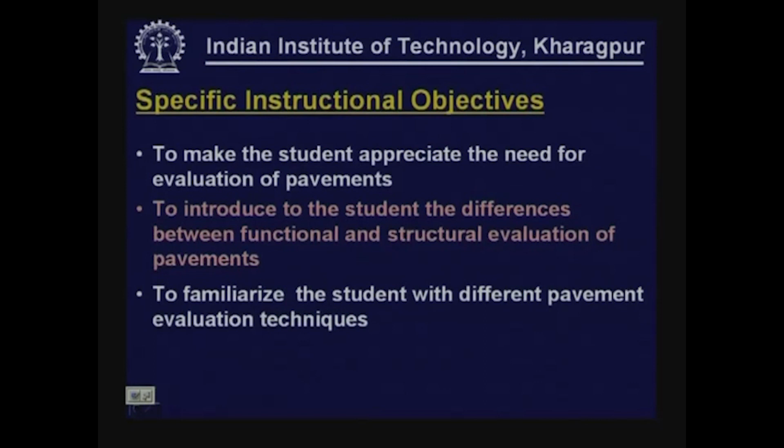Any structure that is built will deteriorate with time when subjected to loads and various climatic factors. So all structures, including pavements, will deteriorate with time. It is necessary that these structures be evaluated occasionally, periodically, to assess their structural condition and also to assess the remaining life of the pavement and how much more time it can serve users satisfactorily.

For that, one should have appropriate tools to evaluate existing pavements, collect data and information, interpret that data, and make the right decisions regarding the condition of the existing pavement and what is to be done if its life has to be extended by a given number of years.

All pavements deteriorate with time due to repeated application of vehicular loads and the effect of climatic parameters. The rate of deterioration depends on the initial condition of the pavement, the rate and magnitude of traffic loading, climatic conditions, and various other parameters.

It is also necessary to evaluate the functional and structural condition of the pavement periodically. We should be able to assess the structural and functional condition periodically and decide whether the pavement requires any maintenance, major rehabilitation, or even reconstruction. The need for maintenance and rehabilitation can be assessed on the basis of this evaluation.

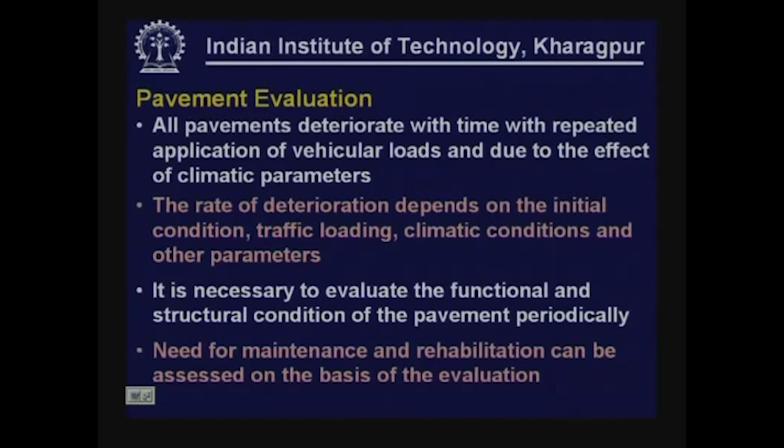Pavements are evaluated typically for two types of performance: functional performance and structural performance. Functional performance is the ability of the pavement to provide a comfortable, safe, economical riding surface to the users. That basically is the function of the pavement as far as the user is concerned.

The user requires a safe, comfortable ride. As long as the pavement is in a position to give satisfactory service to the road user in terms of safe, comfortable ride, the pavement continues to be in a functionally acceptable condition.

Functional performance can be expressed, measured, or quantified in terms of either the present serviceability index discussed in AASHTO pavement design, or in terms of roughness, or skid resistance, or any other parameter related to the surface that relates to the safety and comfort of road users.

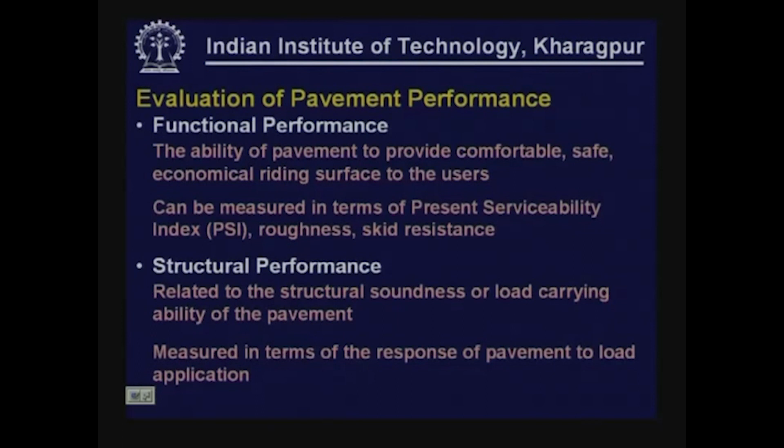On the other hand, structural performance is related to the structural soundness of the structure or its load carrying ability. This can be measured normally in terms of the response of the pavement when subjected to a load. So structural performance is normally expressed in terms of the structural response of the pavement.

As discussed in previous lessons, functional evaluation can be done in terms of present serviceability index. This is one of the commonly used parameters, though not so common in India since AASHTO is not that extensively used here. For evaluation of functional performance of the pavement, present serviceability index is a parameter that is normally evaluated, a concept developed during the AASHO road test.

The AASHO road test equation for present serviceability index correlates the present serviceability index with the surface characteristics of the pavement, such as slope variance, which gives an indication of the variance of the surface profile in the longitudinal direction, and rut depth for a flexible pavement.

Rut depth also applies for flexible pavement; for concrete pavement, both cracking area and patched area are expressed in terms of square feet for 1000 square feet of paved area. Similarly, patching is also expressed in terms of square feet per 1000 square feet of paved area.

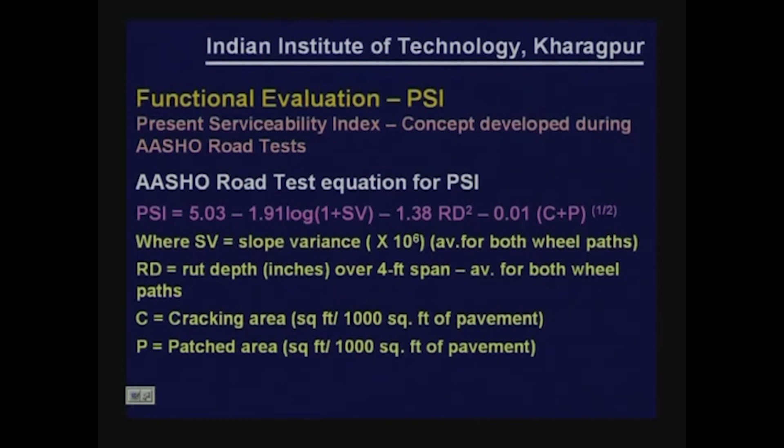So as we can see, in the case of flexible pavement, present serviceability index is mainly based on what can be measured in terms of surface characteristics: surface profile, rut depth, cracking and patching, which is what you can observe on the pavement surface.

Another parameter most commonly used to evaluate functional performance is roughness, how rough the road is. Roughness is usually expressed in terms of a convenient index. Various types of indices are used to express roughness. This is a convenient index that reflects the user's response to a road of a given profile while traveling in a standard vehicle. That means how the user perceives the comfort level offered by a given road having certain profile characteristics and various other surface conditions, expressed in terms of roughness index.

All the roughness indices used by various agencies are developed such that they are sensitive to the road user and the user's perception of surface conditions in terms of the comfort the road user is getting.

Roughness is a measure of variation of surface profile and other surface distresses that may have some influence on ride comfort. So roughness will be influenced by all those surface parameters that affect ride comfort. Some commonly used indices for roughness are bump integrator value, MERLIN roughness index, and international roughness index. We will basically be talking about these three main roughness parameters: bump integrator value (BI), Merlin roughness index, and international roughness index.

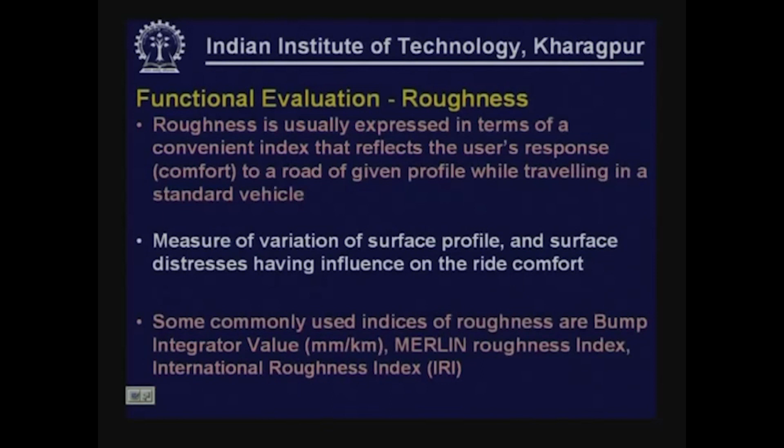The roughness in terms of bump integrator value is normally measured using an equipment called the fifth wheel bump integrator. This comes under a class of roughness meters known as response type roughness measuring meters.

The roughness of the road can be obtained in terms of the surface profile. One can measure the surface profile by taking levels using the rod and level procedure, or there are other equipments which give us indices that say something about the profile of the road.

These indices are also expected to give some idea about the comfort road users get. Response type roughness measuring meters are equipment which measure the response of a given mechanical system to a road having a certain profile. So when this response system equipment travels along a given road, it responds to the variations in the surface profile. This response is measured, accumulated over distance, and given as an index.

For example, in a fifth wheel bump integrator, it is called a fifth wheel because you have one single wheel with an arrangement of chassis and hinge. This has to be towed by another vehicle, so you will have another vehicle towing this fifth wheel. This is a single wheel that is towed by another vehicle, which is why it is called the fifth wheel.

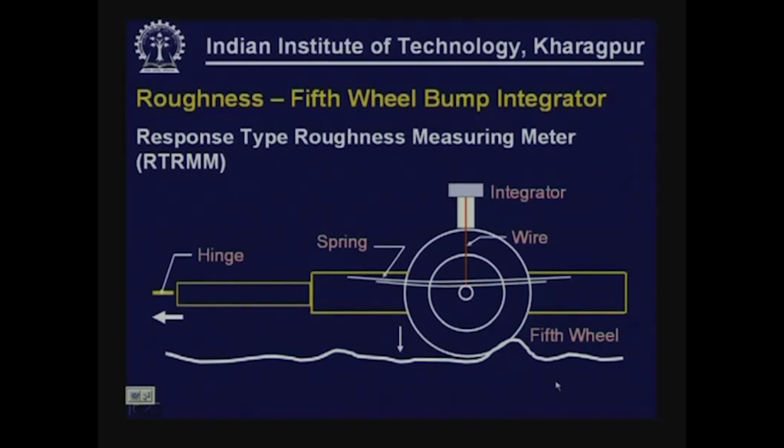The fifth wheel bump integrator has to be towed by a vehicle. That is the reason why it is called a fifth wheel. The vehicle travels at a constant speed, typically the recommended speed is 32 kilometers per hour.

This is because we have talked about the comfort level perceived by a user traveling in a standard vehicle. The vertical movement of the suspension system of the roughness meter is measured and accumulated with distance traveled. So what we are trying to measure is the accumulated vertical movement of the suspension system as the vehicle is traveling forward.

The vertical movement is counted in multiples of a specified vertical distance. Typically the counters used in the fifth wheel bump integrator get triggered, and the value changes whenever there is at least 1 inch of downward movement. If there is a downward movement of 2 inches or 3 inches, the corresponding change in the counter reading will be 2 or 3.

The distance traveled is normally estimated from the revolutions of the fifth wheel. There will be another counter normally to count how many revolutions the fifth wheel is rotating.

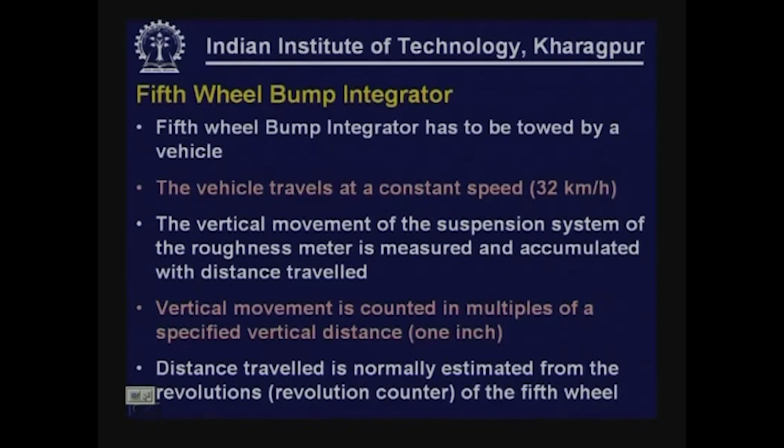Roughness is measured corresponding to the path along which the fifth wheel travels. The fifth wheel will be made to travel along one line. Obviously, it cannot be representative of the entire pavement section.

Normally, we try to make this fifth wheel travel along the wheel path. If you are interested in finding out the average roughness of the pavement, we may have to make the fifth wheel travel along different longitudinal lines and take the average of all those values.

Along a given line also, we may have to make the fifth wheel run a number of times. For example, 3 to 4 runs are normally required along each path, and what we normally represent is the average of these 3 to 4 runs.

Being a response type measurement, the equipment has to be calibrated frequently, because if the vehicle is changed, the parameters of the suspension system will change, so the value may change. Even if the same vehicle is operated again, we may get a different value. Over time also, even if the roughness of the road does not change, the value may change.

If you use another similar response type equipment, another fifth wheel bump integrator, it may give a different value. So it is necessary to calibrate the value obtained from a roughness measuring machine such as the fifth wheel bump integrator, which is a response type equipment. This has to be calibrated so that we know the corresponding standard value we are going to refer to. Bump integrator value is normally expressed as millimeters per kilometer.

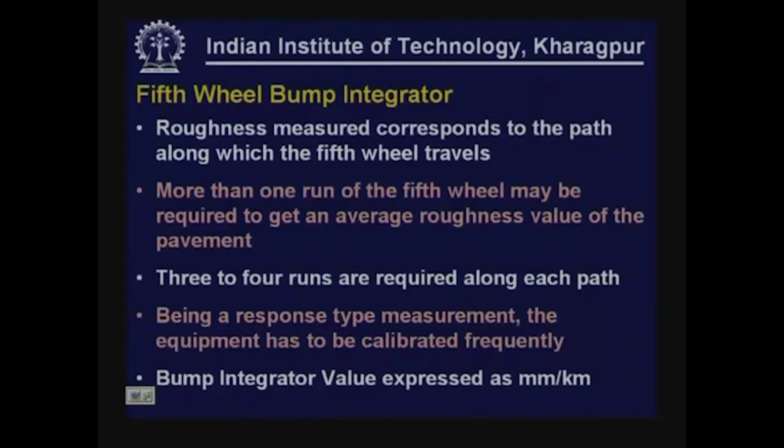Another equipment, a very simple equipment that we normally use for measuring roughness, is the Merlin equipment. Merlin stands for Machine for Evaluating Roughness Using Low Cost Instrumentation.

This is a very low cost equipment compared to all the other equipment used for measuring roughness, such as the fifth wheel bump integrator, and it is simple to operate. This gives an index of the variation of the profile of the road along the path considered, which is what any roughness machine is trying to measure.

This is slow, so it is not suitable for evaluating long stretches. If you are trying to cover a 100 km stretch to measure roughness, Merlin is obviously not the right equipment. We should be able to operate at higher speeds, so we have to use something similar to the fifth wheel bump integrator, which can be operated at some speed. Even 30 km is a slow speed, but it is much faster than what we can achieve with a Merlin machine.

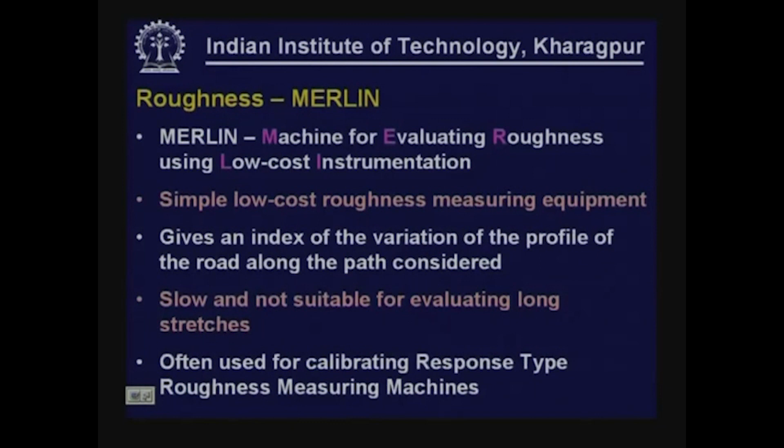However, this is often used for calibrating response type roughness measuring machines, because the roughness measured using a Merlin machine is not a response type measurement. It is somewhat like an absolute parameter.

So this can be considered a standard value, a standard measure of roughness for a given road, which does not change significantly with time if the same equipment is used, as long as the machine is kept in standard format and standard conditions are maintained. So we are likely to get more or less similar roughness values, and that is why it is normally used to calibrate response type equipment.

The principle of Merlin is that it has two legs, a front leg and a rear leg, which rest their feet on the pavement surface. So foot 1 and foot 2 rest on the pavement surface. There is another probe placed in the middle, which also rests on the pavement surface. If you connect the two points where foot 1 and foot 2 rest on the pavement, the position of the probe with reference to that line gives us what is known as mid-chord deviation.

If the midpoint is either above or below that line, we get a mid-chord deviation accordingly. If it is exactly on the line connecting foot 1 and foot 2 points, then there will be no mid-chord deviation. So the machine is moved along a given stretch of road at different positions.

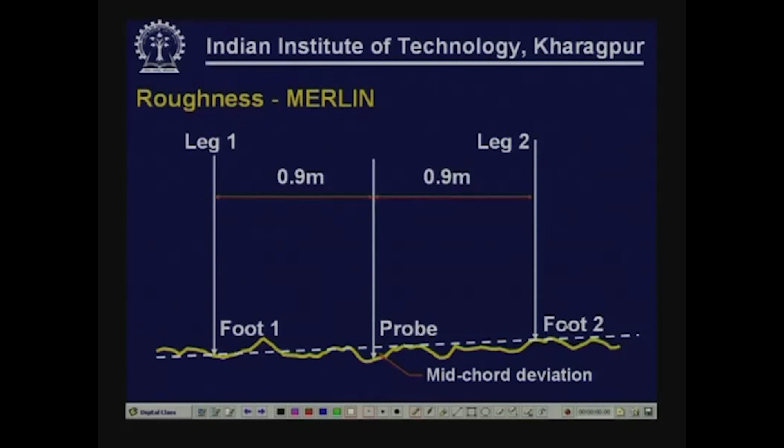This particular diagram represents a particular position of the Merlin on the given road. So for a given position we get one mid-chord deviation. Then for another position, the mid-chord deviation may be above the line or below the line. So accordingly we can get some idea about the variation with reference to these two points about the midpoint.

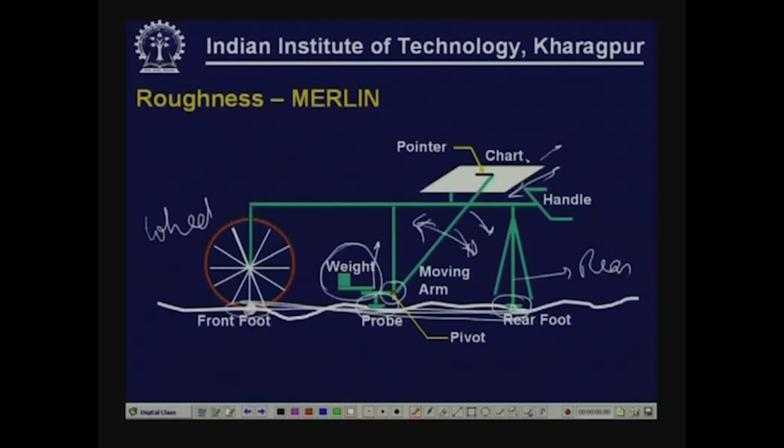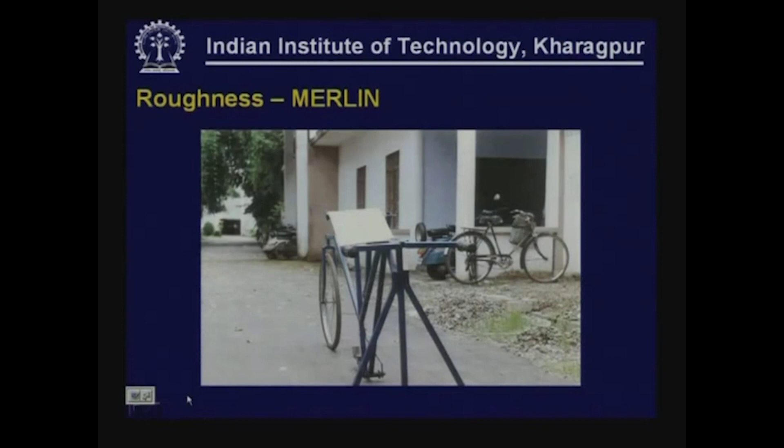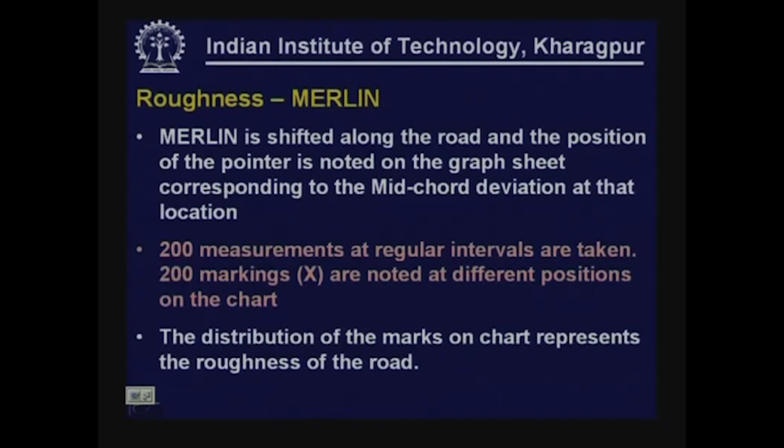As I said, the Merlin machine has to be shifted along the road, and the position of the pointer is noted on the graph sheet. This position corresponds to the mid-chord deviation at that particular location. About 200 such measurements, or 200 such notings on the graph sheet, have to be made at regular intervals. So for these 200 positions, there will be 200 markings made on the graph sheet. The distribution of the marks on the chart represents the roughness of the road.

Typically, this is how a completed graph sheet will look like. Obviously this should have 200 points, but I have not put all those 200 points here. Depending upon the movement of the pointer on the graph sheet, the points are going to be scattered along the graph sheet. A particular block may have more points, other blocks away from the center may have fewer points, depending upon the variation in the surface profile of the road.

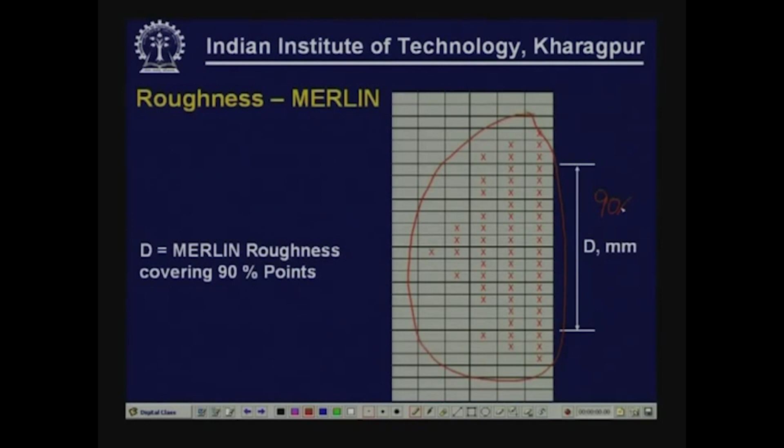What is done is, once you get this scatter in terms of all these points, we consider the spread of these points for 90% of the points. So what we do is we eliminate 5% on either end and consider 90% of the points. The distance within which 90% of the points are covered is represented as the Merlin roughness, that is D, expressed in terms of millimeter as we measure on the graph sheet. What it indicates is, if the road were to have a constant longitudinal slope...

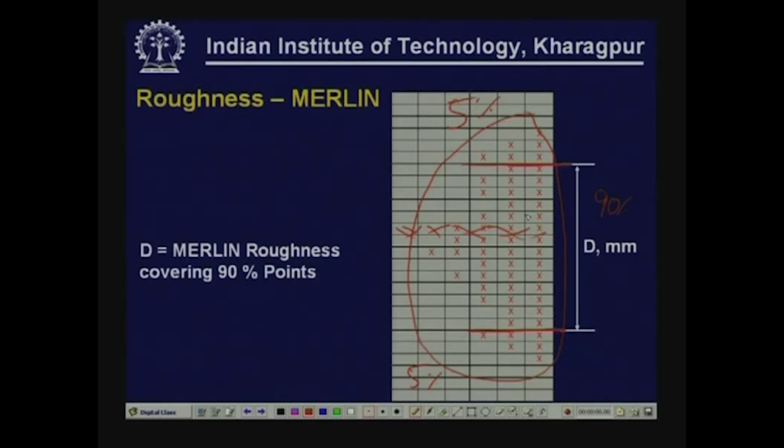There will not be any mid-chord deviation with reference to these two points. The probe will be on the same line, so we will continue to get the points along one line only. All the points will be along the middle of the graph sheet. But as the roughness increases, somewhere it is above the mid-chord, somewhere it is below the mid-chord, and the points get scattered all over the graph sheet. That scatter represents the variation in the profile.

The more the scatter, the greater the distance within which 90% of the points would be lying. If it has more or less a constant slope, with not much variation in the longitudinal slope, then most of the points would be lying close to the center. So 90% of the points could be covered within a smaller distance, and the roughness will be lesser.

Using the Merlin roughness value, other roughness parameters can be estimated. For example, international roughness index, which we will discuss after a few slides, can be estimated as a function of Merlin roughness. Good correlation is found between these two parameters. For the same road, if you measure Merlin roughness and also compute international roughness index, we can find good correlation between them.

For all types of road surfaces, IRI is given as 0.593 plus 0.047 multiplied by D. We have to understand that this is for a range of D ranging from 42 to 312 millimeters, and the corresponding IRI range that we are talking about is about 2.4 to 15.9.

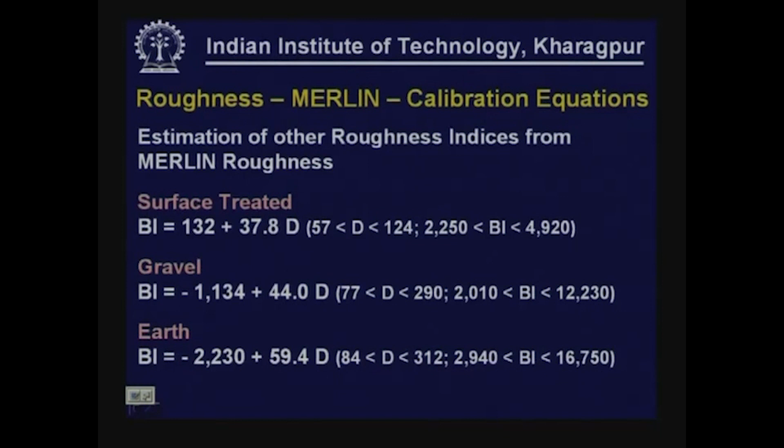The next and most commonly used roughness index worldwide is the International Roughness Index, or IRI. This is a very interesting concept in terms of expressing roughness of a given road. This is an ideal roughness index developed to calibrate response type roughness indices.

Basically, the IRI concept has been evolved to calibrate various response type roughness equipment, because as we have discussed, the measures that we obtain from roughness type response measuring machines will vary over time, and with different machines for the same road you get different values. So there was a need to bring all these parameters that are obtained over time with different equipment, maybe for the same road having the same characteristics, to the same platform and then standardize all of them.

It is obvious that each one of these machines is going to give different values, but what is the correct value, or what is the standard value that has to be expressed for a given road, because it is the same road.

The response type system of measuring roughness in millimeter per kilometer, though popular, is found to have some difficulties. Same roughness values are not obtained if different vehicles are used. Even with the same vehicle, similar roughness values are not obtained over time.

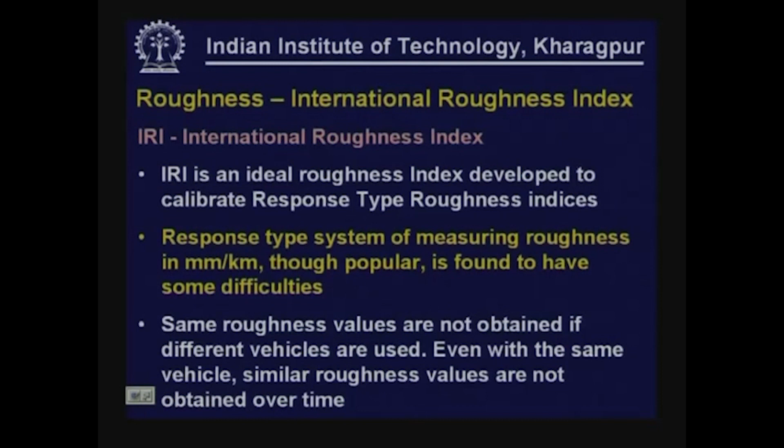So IRI is a computer based virtual response type system. This is not something that we are going to measure; we cannot measure IRI, but we can compute it from some given inputs. So whatever value we compute is a standard value. It is not something that responds physically to the profile; there are no physical practical parameters that influence this parameter. This is a theoretically computed value.

It represents the response of an ideal virtual vehicle to a given road profile. So this is also a response type in some way, but it is the response of an ideal theoretical vehicle, not an actual vehicle. Since this is a theoretical vehicle, its coefficients, suspension system, and other parameters are not going to change over time or at any time.

So it represents the response of a theoretical vehicle to a given profile. Typically, only a quarter of the vehicle is considered; we do not consider the full vehicle because the analysis becomes more complex, and most of the time we are only interested in analyzing the roughness along a given profile. Taking the entire vehicle does not really mean much if you are considering only one profile, but if you want a representative value for a given stretch of road, at least say one lane, then we can simulate the entire vehicle, use the complete vehicle, and find its response to the given profile, then express it as IRI.

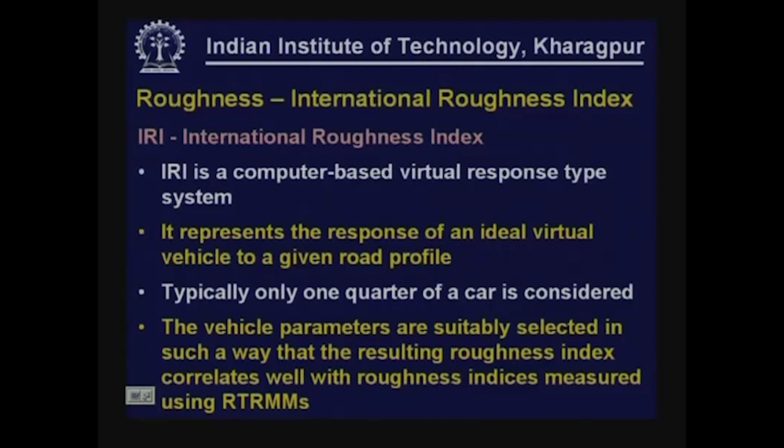Basically it is for a given profile that the IRI is calculated. The given profile will be along one line. The vehicle parameters are suitably selected in such a way that the resulting roughness index correlates well with roughness indices measured using standard RTRMMs, response type roughness measuring machines. So, the golden car or quarter car parameters are selected in such a way that the resulting IRI correlates well for a given road.

For example, for a given road we measure the profile using the rod and level method, we get the exact profile of the road. For the same road, when we conduct a survey using a roughness meter, let us say a fifth wheel bump integrator, we know what value we get. That value can be correlated with the IRI that is calculated.

For calculating IRI, we have to select some parameters of the vehicle. So normally what is done is that for calculating this IRI, the vehicle parameters are selected and fine tuned in such a way that there is good correlation between the computed IRI and the measured roughness value using RTRMMs.

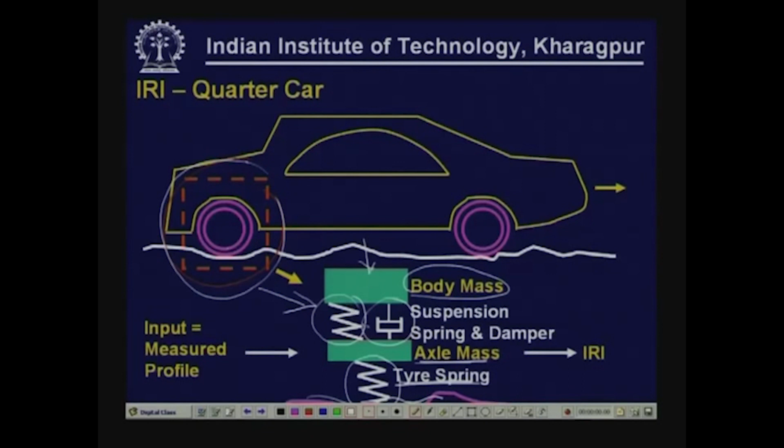So we have to have all these parameters. We have to select what is the body mass coming on this vehicle, on this wheel, then the spring and suspension system corresponding to the suspension system used in the vehicle, then the mass of the axle, and we have to have a spring representing the tire.

So input to this system, this is a theoretical system, and then we can find out when it is subjected to variation in this profile, when this vehicle is made to move over this profile at some speed, we can compute theoretically, using some theories, the vertical stroke of the suspension system. As it moves along this profile, the cumulative vertical movement of the suspension system can theoretically be calculated.

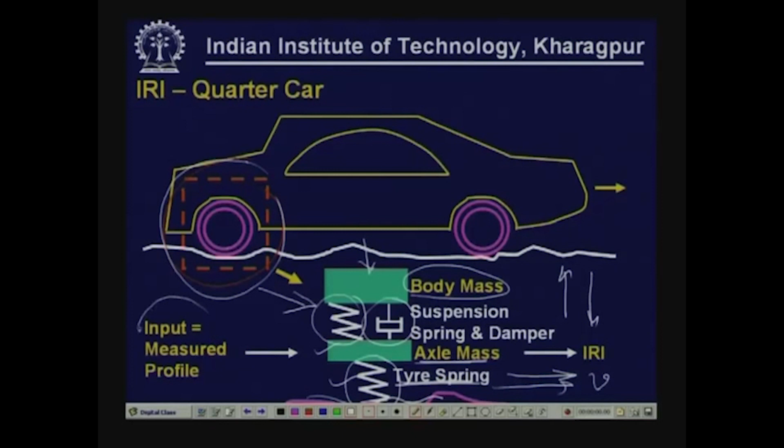So for this system we have to give as input the measured profile. The measured profile can be in terms of discrete values, levels at different locations, maybe every 0.5 meter, 1 meter, 5 meters, depending upon how closely we are able to collect the data. That profile can be fed to the system. Then there is a mechanical dynamic system that is used, and the output available from the system will be the accumulated stroke of the suspension system with distance.

The suspension stroke of the ideal hypothetical quarter car in response to a given road profile, as it is made to move over a road having different characteristics. So the quarter car's suspension system responds, the suspension stroke is calculated as IRI. The simulated accumulated motion of the suspension system divided by the distance travelled is the IRI.

Quarter car with a specific set of parameters is called the golden car, because there are certain parameters we have to select: the body mass, axle mass, the suspension system spring and dashpot parameters, and the spring representing the tire. All these parameters have to be selected and put into the dynamic system, so that we can calculate the vertical movement of the suspension.

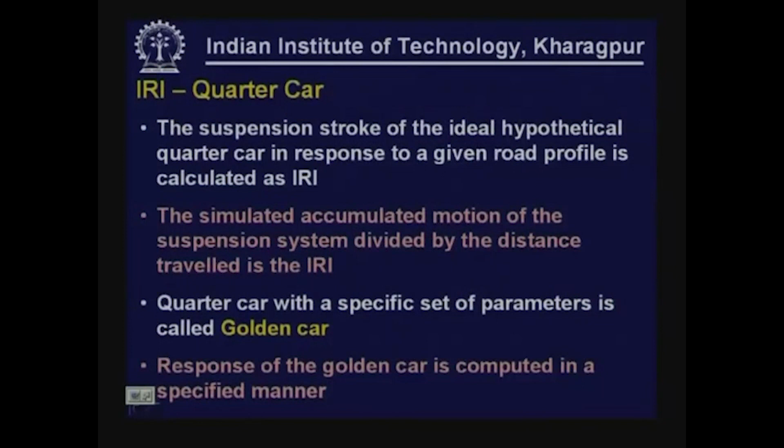The response of the golden car is computed in a specified manner. How the profile has to be processed, how the suspension system movement has to be calculated, there is a set of steps involved in computing the IRI.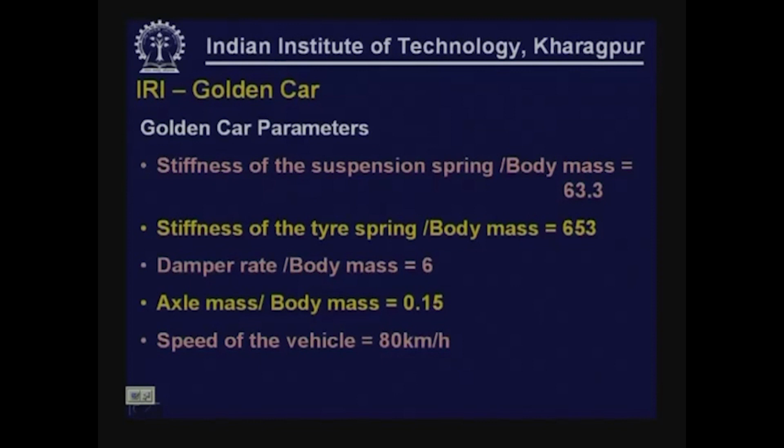The advantage with IRI is that it is reproducible and stable with time, because it is a theoretical value for a given profile which can be fed to the system. Nothing changes as long as you do not change the model parameters of the golden car. So for a given profile, anytime you calculate using the same procedure, you get the same IRI value, which becomes a standard for that profile.

IRI is obviously an indicator of the pavement, because it represents an index which represents the profile of a given road. We are using the profile of a given road to come out with an index, which obviously represents the condition of the pavement.

IRI for a given road profile is usually obtained with the help of computer software. Normally we cannot do hand calculations for computing IRI, because there is a lot of data to be processed in terms of the profile, and a lot of calculations to be made in computing the suspension system stroke.

Typically, IRI values would range from 0 to 20. A value of 20 would represent almost the worst kind of road.

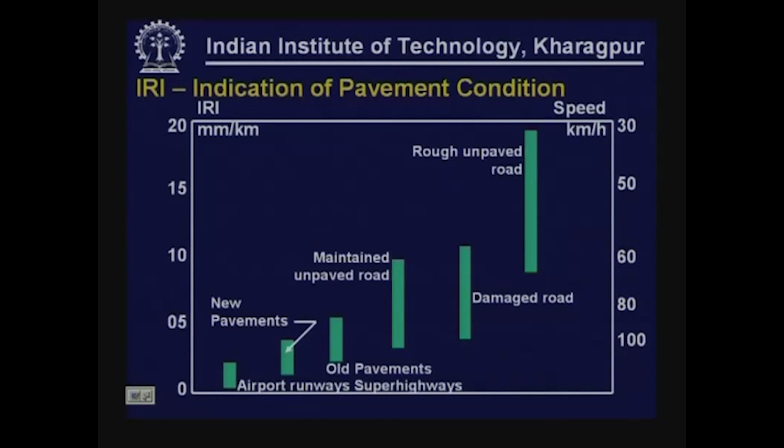On the right hand side, we also have the speed. If the IRI indicated on the left hand side exists for a given road, or is computed for a given road, what speed can be expected on that road? For example, if the IRI is 20, the corresponding speed would be about 30. If the IRI value is as small as 2 or 3, we can talk about speeds as high as 100 kilometers per hour.

That was about functional evaluation. For functional evaluation, we talked about assessing it in terms of the present serviceability index, which can be estimated by measuring physical parameters such as roughness, cracking, and longitudinal slope variance. We also talked about various roughness indices: fifth wheel bump integrator, Merlin, and IRI. There can be various other ways of evaluating the functional performance of the pavement.

Now we will talk about structural evaluation of pavements, which is required to assess the structural soundness of the pavement at a given point in time. This is also required for estimating the remaining life of the pavement and to determine the requirement of rehabilitation, that is, to calculate the overlay thickness if required.

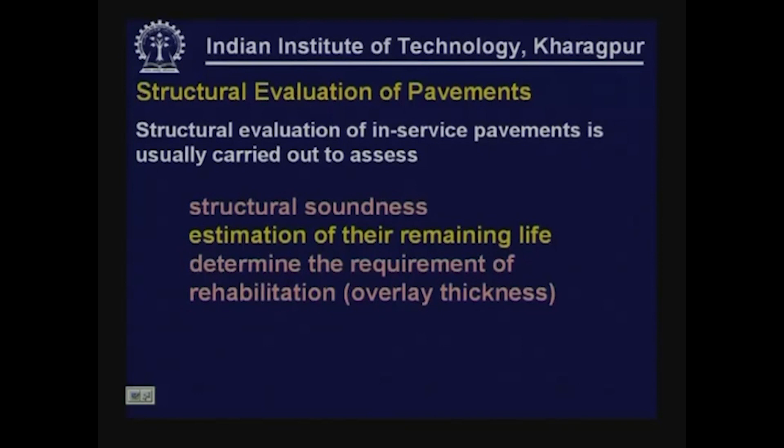Structural evaluation of pavements can be done either destructively or non-destructively. In destructive evaluation, the pavement is cut open, or we take cores from the pavement, collect samples, and bring them to the laboratory to test under representative conditions similar to those in the field, in terms of density, gradation, and whatever conditions need to be simulated for a given material as they exist in the field. The material properties then have to be evaluated.

The material properties we evaluate have to correspond to the design methodology we have. For example, if we have a design methodology in which CBR is the only parameter used, we evaluate the CBR value of the material. Or if we are using the elastic modulus value in our design procedure and analysis, then we have to determine the elastic modulus value of the material collected from the field. Again, we have to use representative materials, and the conditions under which we test must also be representative of the conditions found in the field.

So normally, for representative destructive testing, we can cut open the pavement and remove all the material. For example, if we are trying to find out the existing density of the subgrade, we cut open the pavement, find the density, find the moisture content, and possibly also conduct a field CBR test.

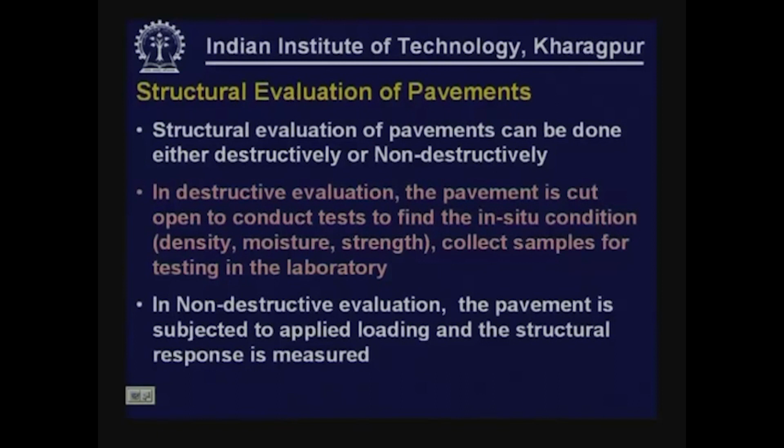On the other hand, in non-destructive evaluation, the pavement is subjected to some applied load and the structural response is measured. Destructive testing is normally very difficult. You have to cut open the pavement at a number of locations. You cannot go on excavating the pavement.

Of course, if you do not have any equipment capable of carrying out non-destructive evaluation, that is the only thing you may be doing. You may carry out only destructive evaluation. But if possible, one should go for non-destructive evaluation, in which we apply load and measure the structural response of the pavement.

The general approach of a structural evaluation method is to apply a specified load to the pavement in a specified manner. The load applied and the manner in which it is applied has to correspond to the theoretical model that we are using in making interpretations about the pavement condition.

Measure the structural response of the pavement after you apply the load. Structural surface deflection is the most common response that is measured, because it is very easy to measure the surface deflection. On the basis of the surface deflections we measure, we back calculate the material parameters.

It could be the thicknesses. If you do not know about the thicknesses, you have some information in terms of the structural response. We can back calculate the thicknesses, the material properties, or some parameter that tells us about the strength of the pavement. So we can back calculate pavement parameters such as material properties, thicknesses, or general conditions from measured deflections and applied loading conditions.

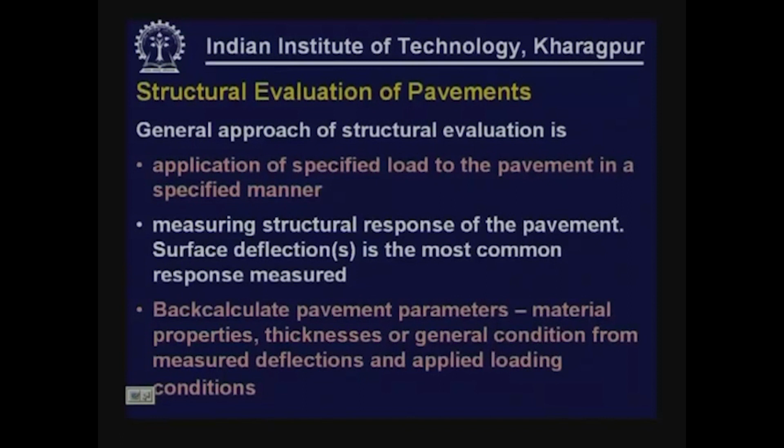The application of load for NDT testing can be done in different modes. It can be a static load, slow moving or creep load, vibratory load, or impulse load.

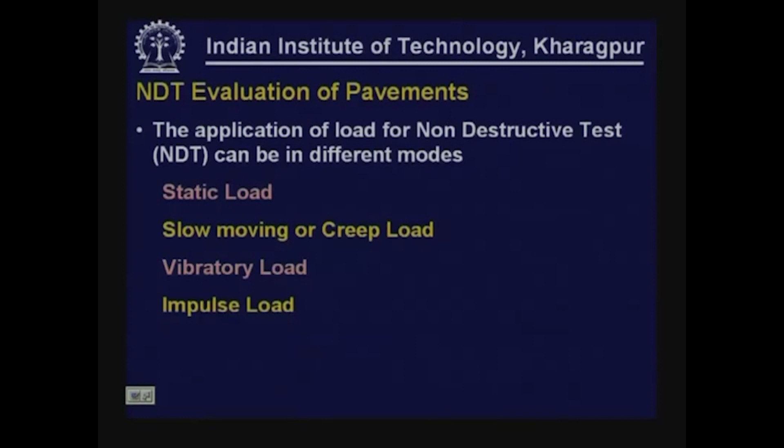In a static load, the simplest static load testing could be a plate load test. If you are interested in determining the modulus of subgrade reaction, this is one method of conducting a plate load test. You apply static load, then measure the deflection. From the deflection and the load applied, you find some parameter about the

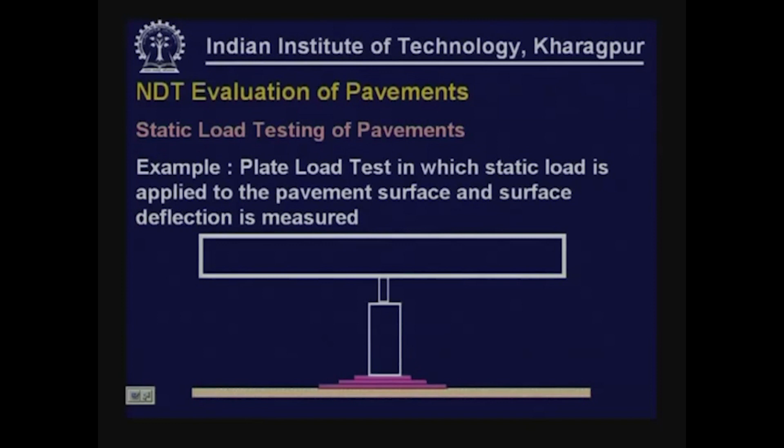subgrade or any layer on which you are conducting the test. So we may get information about modulus values, or the modulus of subgrade reaction if using this as a foundation for concrete pavement. So plate load test is one static load arrangement testing that we can do on pavements.

The other most commonly used method, which can be done either in static mode or creep loading condition, uses the Benkelman beam apparatus. We will not go into complete details about the Benkelman beam procedure, because we will be covering this in the next lesson when we talk about design of overlays using the Benkelman beam apparatus.

The Benkelman beam is an apparatus used for measuring the surface deflection of the pavement subject to a standard truck load. We use a standard truck to apply load to the pavement surface, then we measure the pavement surface deflection. So the load applied is a standard truck, and we measure one single surface deflection, which is the maximum deflection.

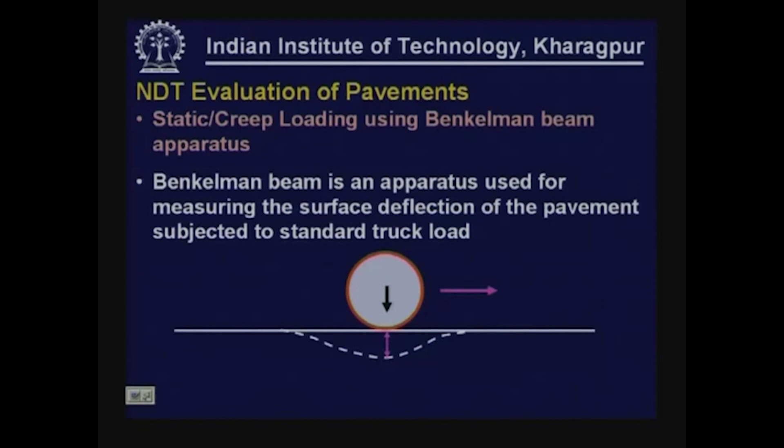Maximum surface deflection is measured using the Benkelman beam in two different modes, using two different procedures. One is the WASHO procedure, Western American State Highway Officials method, in which the deflection is noted as the wheel approaches the point. The wheel will initially be away from the point, and as it approaches, we measure the deflection. When the wheel load is right on the point, the maximum deflection is observed.

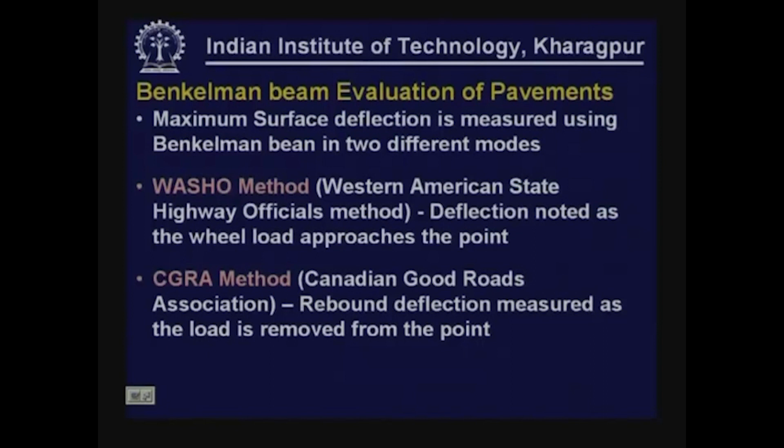In the other procedure, initially the wheel is at the point, and we note down the initial deflection reading. As the wheel load moves away from the point, we see the difference, which is known as the rebound deflection. This is the CGRA procedure, Canadian Good Roads Association procedure, in which we measure the rebound deflection as the load is removed from the point.

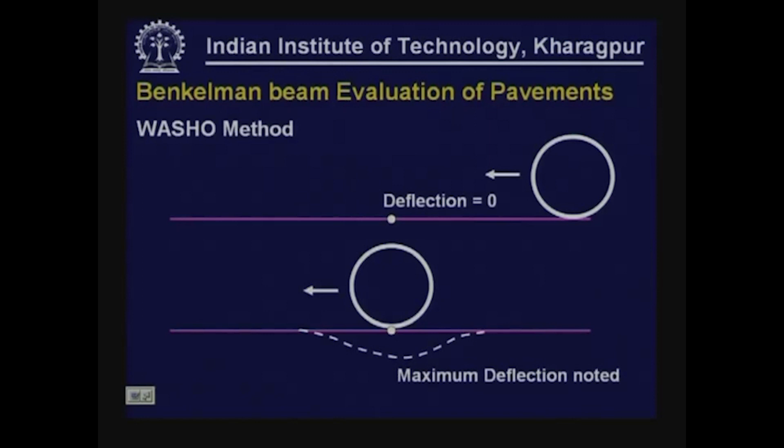Both procedures are depicted here. In the WASHO procedure, initially the load is away from the point, so deflection is 0. As it approaches and is right over the point, we observe the maximum deflection. In the other procedure, CGRA, initially the load is on the point itself, so you already have the maximum initial deflection. When you remove the load away from the point, deflection theoretically has to become 0, and the difference is the rebound deflection.

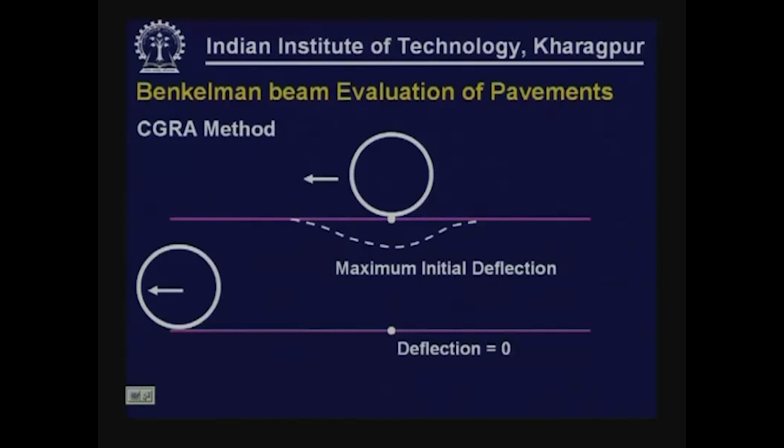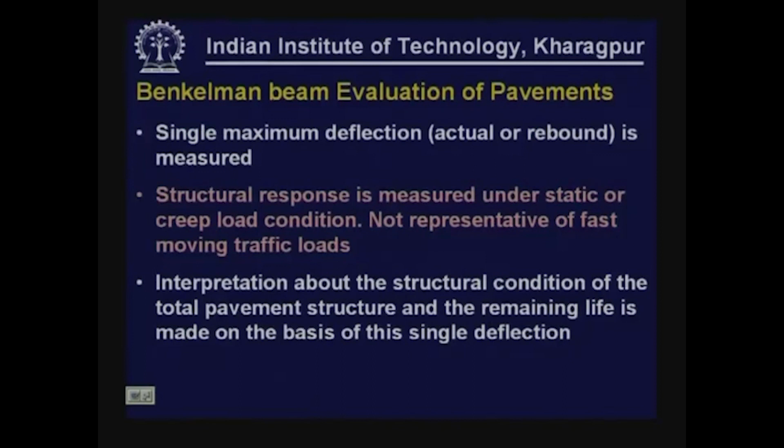What we get for Benkelman beam evaluation of pavements is one single maximum deflection, either the actual deflection in the case of WASHO procedure, or the rebound deflection in the case of CGRA procedure. Such structural response is measured under static and creep load conditions. This is a problem, because the actual loading condition applied on pavements is by fast moving vehicles, and loading time is very short, so the loading we apply using a Benkelman beam procedure is not very realistic. The interpretation about the structural condition of the pavement and its remaining life is made on the basis of this one single deflection available to us.

The maximum deflection alone does not give an indication of the condition of different components of the pavement.

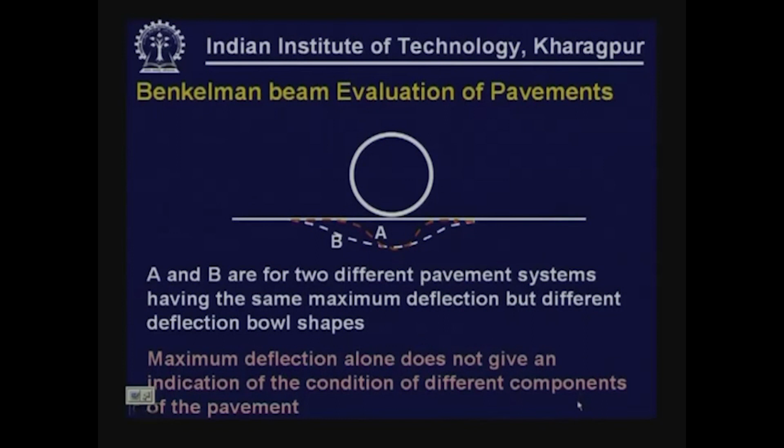That's the reason why most commonly structural evaluation is carried out using the falling weight deflectometer, or FWD. It works on the principle of applying an impulse load to the pavement and measuring the shape of the deflection bowl. That means we do not measure one single deflection, we measure more than one - typically 5, 6, or 7 deflections. The load applied is not static or slow moving, it is an impulse load, with duration and magnitude simulating the load actually applied by moving traffic vehicles. Since more than one surface deflection is measured, more information is available about the pavement.

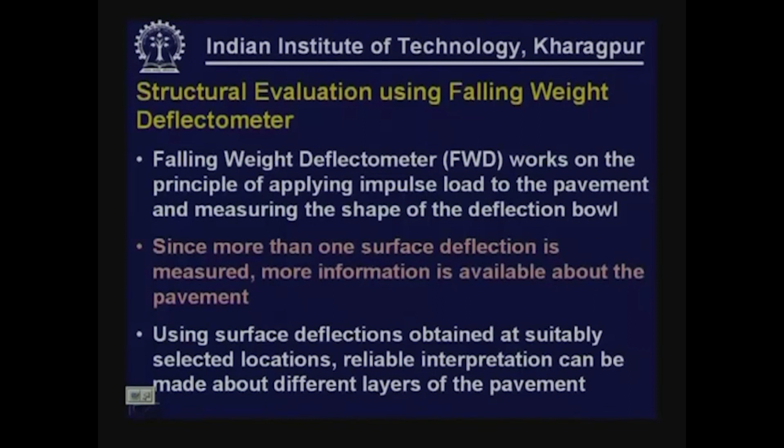Using surface deflections obtained at suitably selected locations, reliable interpretation can be made about different layers of the pavement. Because we have more deflections, more information is available, so we can interpret better about the pavement condition and about different layers of the pavement.

In general, FWD consists of an arrangement to raise a specified mass to a specified height and let it fall freely on a loading plate placed on the pavement surface, through a spring. The mass, the height to which it is raised, and the stiffness of the spring are suitably selected to produce a load of magnitude and duration similar to the load pulses produced by moving traffic on the pavement.

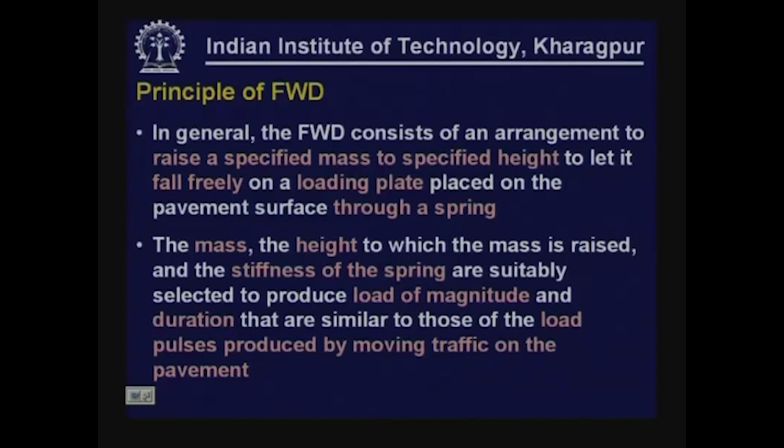This sketch explains the principle of a falling weight deflectometer. As you can see, there is a falling mass raised to a certain height, a loading plate, and a spring arrangement. The mass is made to fall on the spring, which in turn transmits the load to the pavement surface. There are a number of geophones or other sensors used to measure deflections, placed at different radial distances from the center of the wheel load, so we can measure the shape of the deflection bowl once a load is dropped.

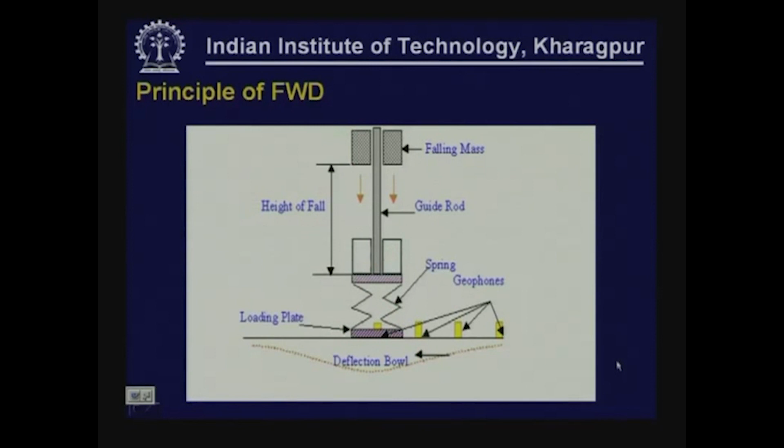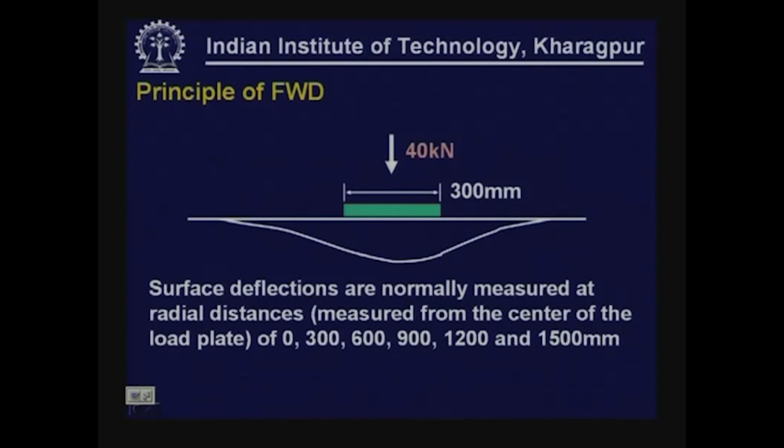Typically this is the loading adopted: a 40 kilonewton load is applied, which is half the standard axle load, over a 300 millimeter diameter loading plate, giving a contact pressure of about 0.56 MPa. Surface deflections are normally measured at radial distances from the center of the load plate of 0, 300, 600, 900, 1200 and 1500 millimeters. In many cases, deflections are also measured at irregular intervals wherever required.

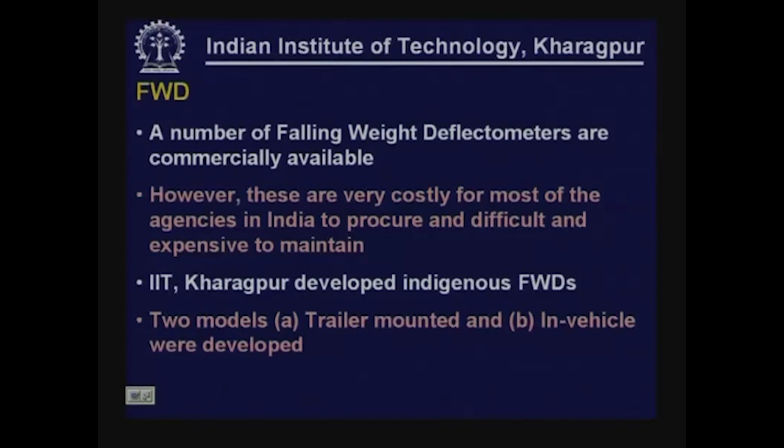A number of falling weight deflectometers are commercially available. However, these are very costly for most agencies in India to purchase, and they are even difficult to maintain. IIT Kharagpur has developed indigenous falling weight deflectometers and has been using them for the last 10 years. Two models were developed: one trailer mounted, the other an in-vehicle FWD.

These photographs, in the next few slides, show the two models developed at IIT Kharagpur. This is the trailer mounted one, very simple - we can see the mass spring system.

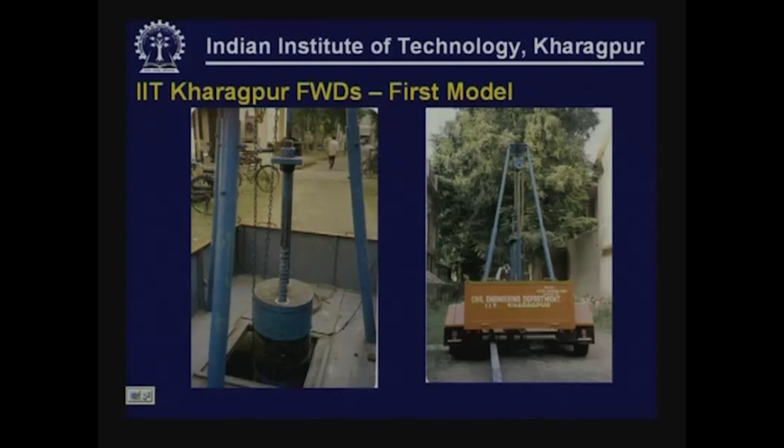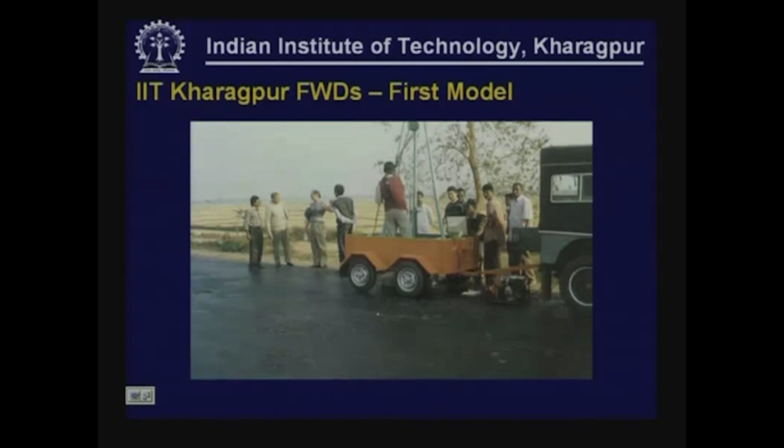We can also see the geophones placed behind the trailer to measure the deflections. This is a photograph showing the pavement evaluation of National Highway 6 using the trailer mounted falling weight deflectometer.

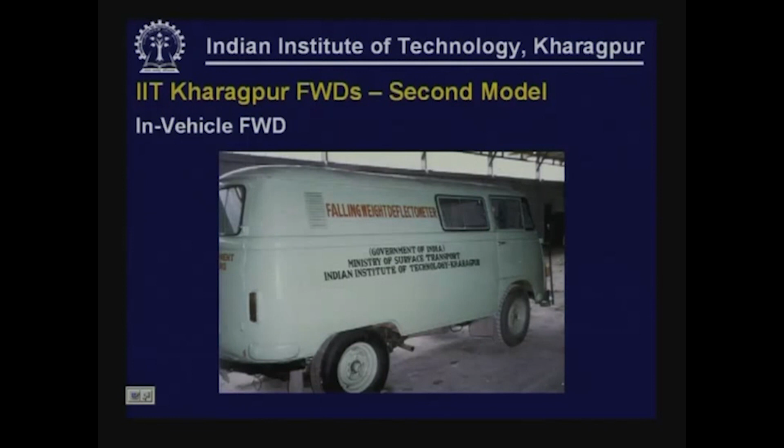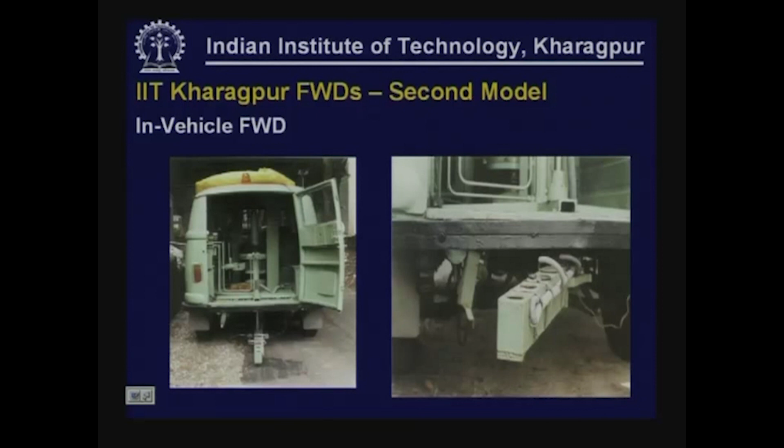National Highway 6 being evaluated using the falling weight deflectometer in vehicle. The salient features of this in-vehicle falling weight deflectometer are: it is housed inside a covered vehicle so that maneuverability of the equipment on heavily trafficked highways becomes greater. All the operations are automated and deflection data is collected through a data acquisition system.

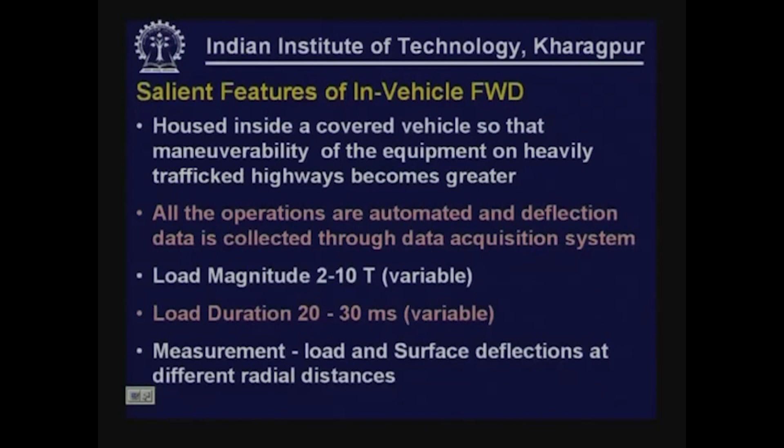Load magnitudes in the range of 2 to 10 tons can be applied, and this can be varied. Load duration of 20 to 30 milliseconds can be applied, and again this can be varied. The measurement done is load and surface deflections at different radial distances. The load applied and the surface deflections at different radial distances can be measured.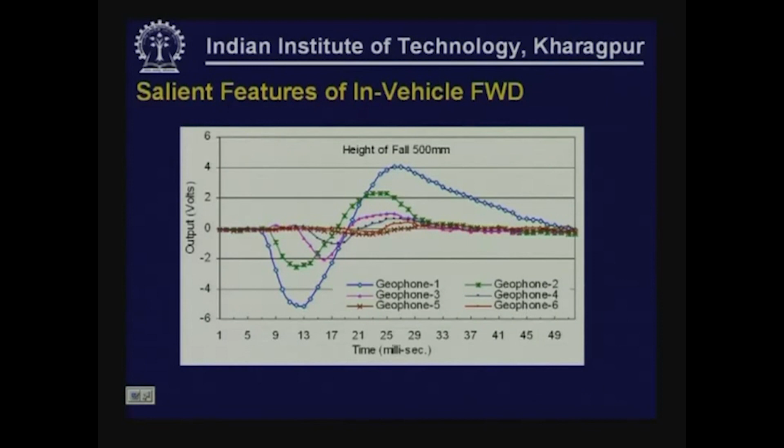This diagram shows a typical output obtained from the geophones. Each one of these lines represent different deflections measured at different locations. Interpreting falling weight deflectometer data, we get load applied, load plate radius, surface deflections at different radial distances from the FWD testing procedure.

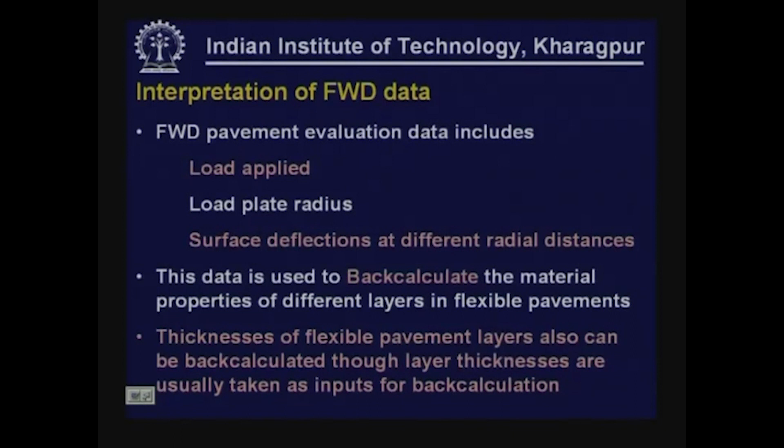This data can be used to back calculate the material properties of different layers in flexible pavements. Thickness of flexible pavement layers also can be back calculated, although layer thicknesses are usually taken as inputs for back calculation. We can back calculate the material properties, we can also back calculate the thickness, but normally we get layer thicknesses either from construction history or from indirect testing procedures. We normally use them as inputs, but there are processes which can back calculate layer thickness also along with the layer material properties.

In the case of concrete pavements, the modulus of subgrade reaction and elastic modulus value of the slab can also be estimated. FWD evaluation can also be used to estimate the load transfer efficiency of joints in concrete pavements. It can also be used to identify gaps below the pavement.

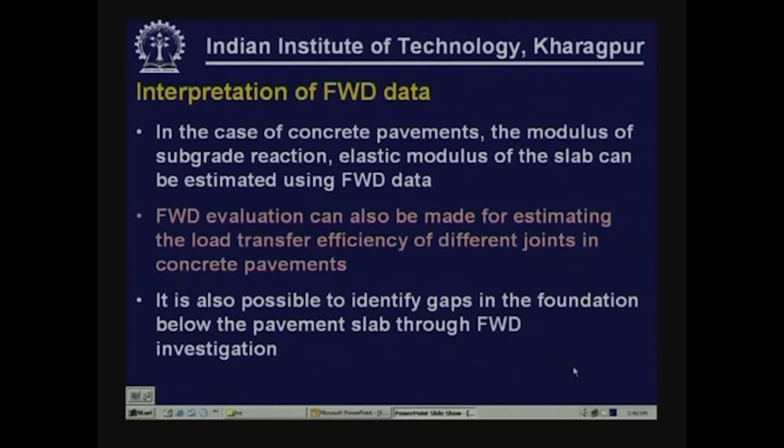To summarize, in this lesson we have discussed about the need for pavement evaluation. We also discussed various methods for measuring the functional condition of the pavement, especially in terms of different roughness indices. We have also discussed the concept of international roughness index, and the disadvantages of structural evaluation of pavements compared to FWD evaluation of pavements.

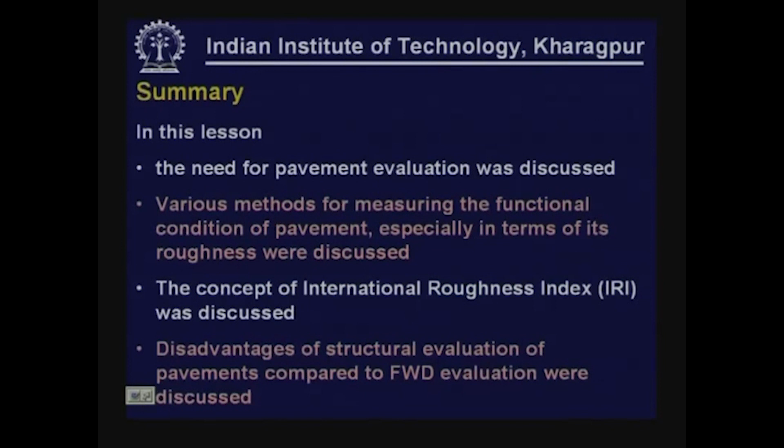The questions from this lesson are: What are RTRMMs? Compare Merlin with fifth wheel bump integrator. Why is it necessary to calibrate RTRMMs? What is a golden car? Why is FWD evaluation better than Benkelman beam evaluation?

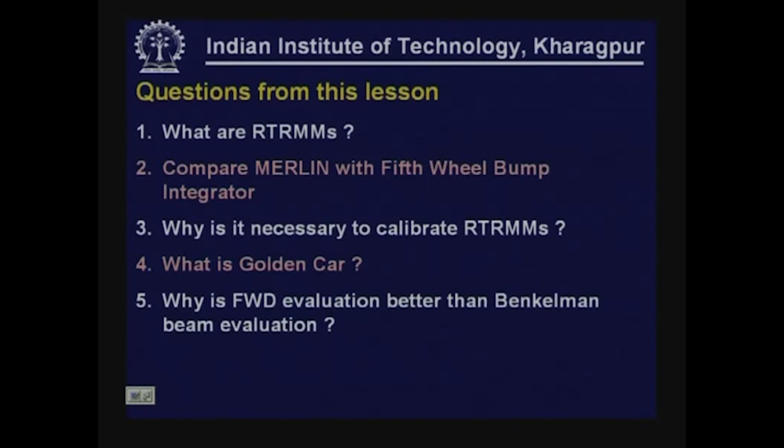We will now have the answers to the questions that we asked in lesson 4.16. Lesson 4.16 was on concrete pavement design using PCA procedure and AASHTO procedure.

What are the main differences in terms of the failure and performance modes considered in PCA and AASHTO designs? There is a significant difference between the PCA procedure and AASHTO procedure. AASHTO performance is defined in terms of PSI, present serviceability index, which only takes into account surface characteristics, longitudinal slope variance, cracking and rutting, whereas the PCA procedure involves theoretical evaluation of the pavements. So fatigue criterion is there, and erosion criterion also is there.

Which are the critical regions of the slab considered for fatigue and erosion damage? Especially we are referring to PCA because AASHTO has no such analysis available. For fatigue analysis, the edge region is considered critical. For erosion analysis, since deflection is more important, the corner region is considered important.

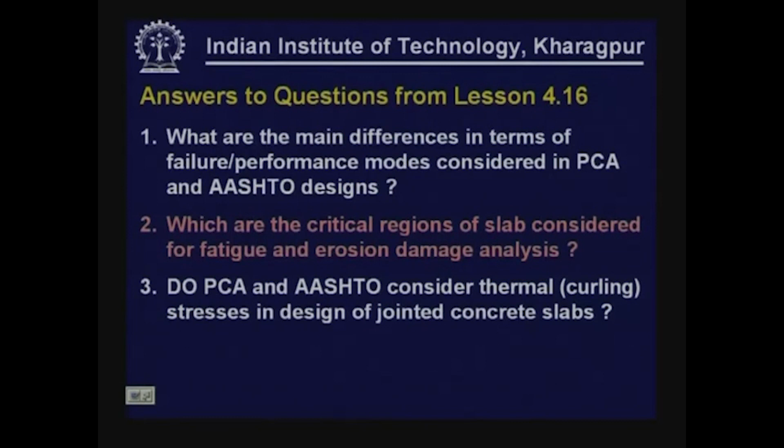Do PCA and AASHTO consider thermal curling stresses in the design of jointed concrete slabs? AASHTO does not take into account thermal stress at all. PCA also does not take into account thermal stresses, because it is not considered in fatigue analysis, since the combination of thermal stresses and wheel load stresses throughout the season is not going to be additive. That is the reason curling stresses are not considered in the PCA design.